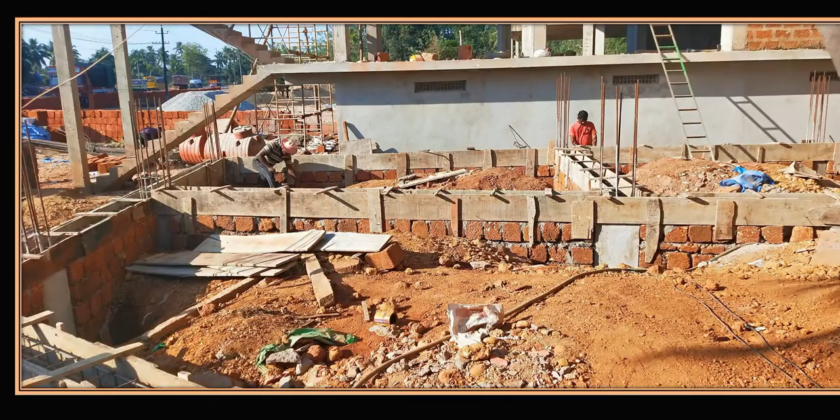See, this is one of a local construction which is happening, and you can see they have put up the plinth beam shuttering, right? So usually what they do, they cast the column up to the bottom of the plinth beam, because see, once you place the concrete, the concrete will be up to this level, so this will be my top of plinth beam.

Let me write it here. So this will become my top of plinth beam, isn't it? I'll write it as PB, top of plinth beam, right? So this becomes my top of plinth beam.

So whenever we do the casting of the column, we have to do it up to the bottom of the plinth beam, and once your column casting up to the bottom of the plinth beam is done, next what we do, usually here in the local construction, they put up this laterite stone. You can see the stones here. So these are the laterite stones. They are going to put up the laterite stone up to the top of this RCC column, or you can say up to the bottom.

And once that is done, they put up this shuttering. So you can see the shuttering here. All these are the wooden shuttering they have put up for the plinth beam, right? And how do you put up all these things? For that, when you're working as a site engineer, you have to refer the details, like you can see here. We are putting up a plinth beam, so you have to read the plinth beam layout. This is a drawing you usually get when you work as a site engineer.

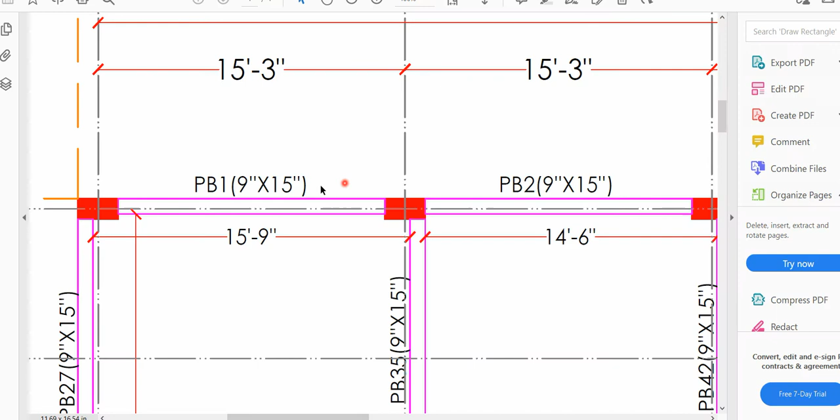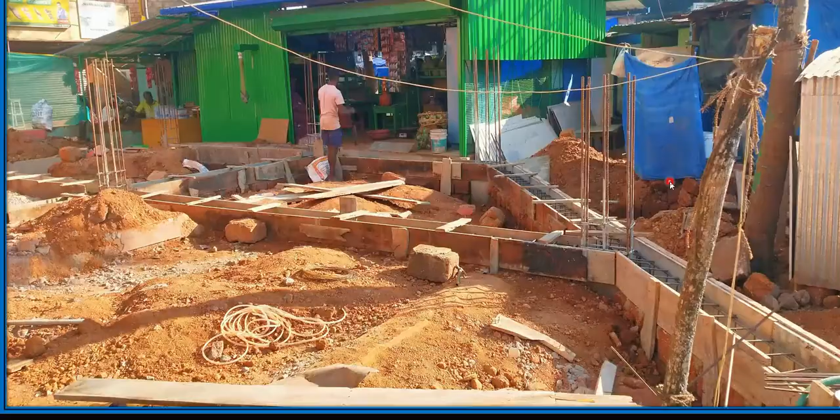See, in this way you have to keep on doing it for each and every beam. It's a very big project what I'm showing here. So once that is done, you can see one more picture here. Next you have to put up the reinforcement. You can see the reinforcement put up here. All these are my reinforcement.

Now for the reinforcement, you are going to get a different drawing. You can see what is written here, a schedule of RCC plinth beam. This is PB1, PB14, PB19, all these are the different beams. If I go back here, you can see all the beams, like PB20, PB21, PB16, PB15 and all. Here only the sizes are mentioned. You don't know what reinforcement is coming here. For that you have to refer this kind of drawings.

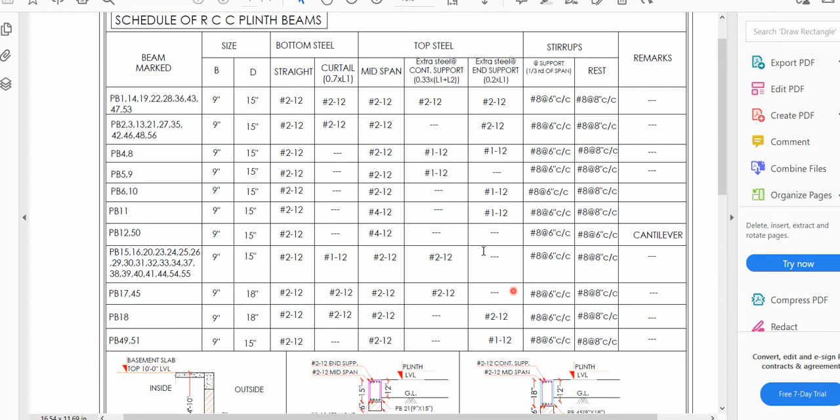Let us say, for example, I want to look at this particular beam, PB20. I want to know what kind of reinforcement I am supposed to provide here. So I'll go here and search for PB20. I'll just scroll down quickly.

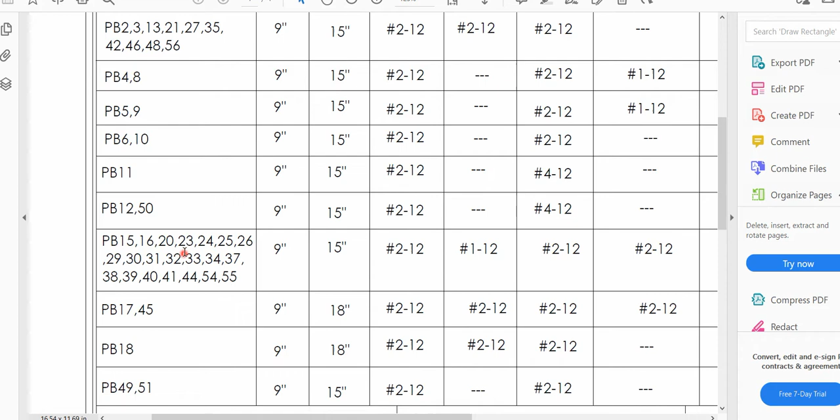Yeah, you can see it here, right? PB15, 16 and 20. That means PB16, 23, all these are the same kind of beam, where the size of the beam is 9 inches and the depth is 15 inches. And then they have mentioned here what is called bottom steel and what is called top steel.

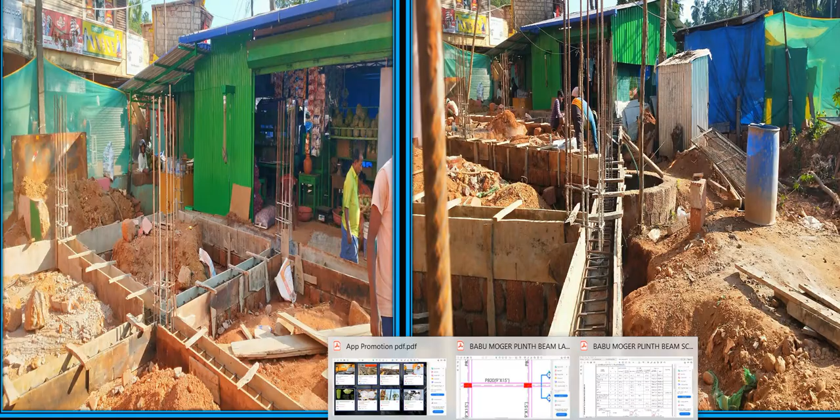Now if I go back to the PPT again, you can see here the top steel. You can see here you are providing a top steel, isn't it? So this is my top steel, you can see here. And in the bottom also you can see certain reinforcement. This will be my bottom reinforcement. So all these things will be given in the structural drawing. So it's given here, bottom steel and top steel.

Okay, now coming to this point, we will not understand this in the same lecture, because it will become a long lecture. Forget about all these things, straight, curtail, mid span and all. Okay, and then coming to the stirrup. Stirrup means, you can see it here. So these are called stirrups. You can see they are put up in this way, no? See, something like this. Yeah, it has gone in this way. Okay, so these are called stirrups.

Now what diameter of the stirrup you are supposed to use, and what is the spacing, right? So that is very important. What is the spacing you are supposed to keep? Like say in between these two stirrups, what is the spacing? What is the spacing in between these two? All these things will be mentioned in the structural drawing again.

I'll go back to that again. So you can see it's written here. You have to provide an 8 mm bar at 6 inches center to center spacing. And what do you mean by this? At support 1/3 of span and rest. All these things we'll try to understand as we go forward in the lectures, right?

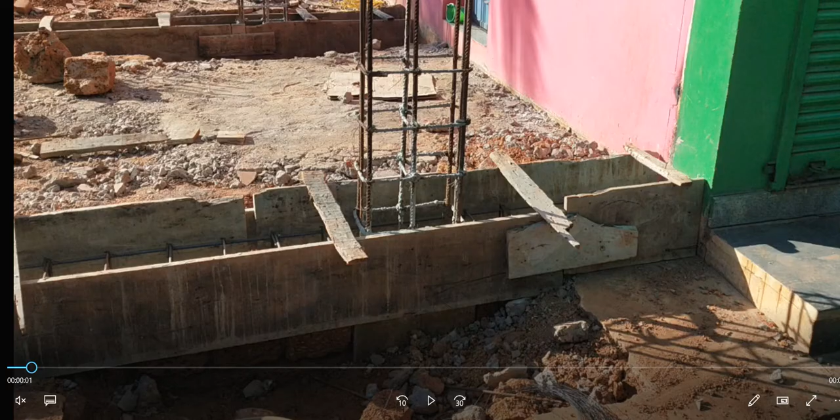Anyway, we'll go back to our main part of this video. So I'll be playing this video. Just see how this shuttering is done. See, all these are the shuttering what they have done, right? Again, it's a local construction. They'll not be following the quality stuff and all, because these people don't believe in providing the cover blocks, right? Because the usual practice is that we need to provide the cover block.

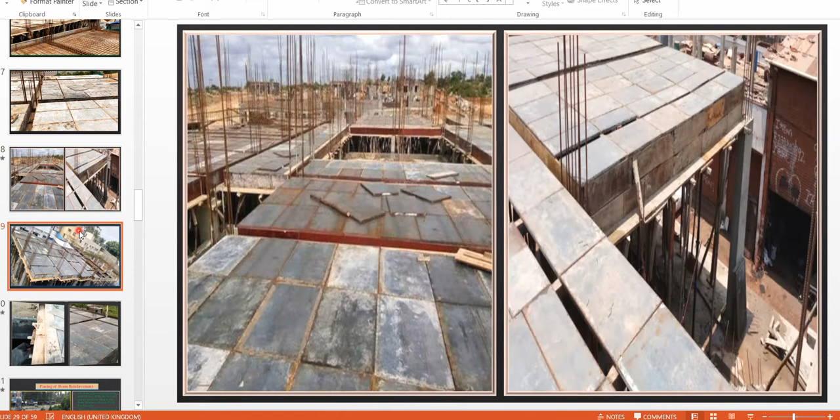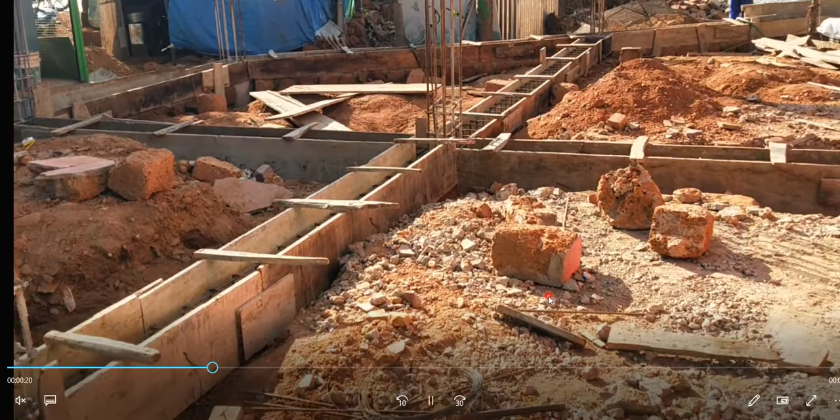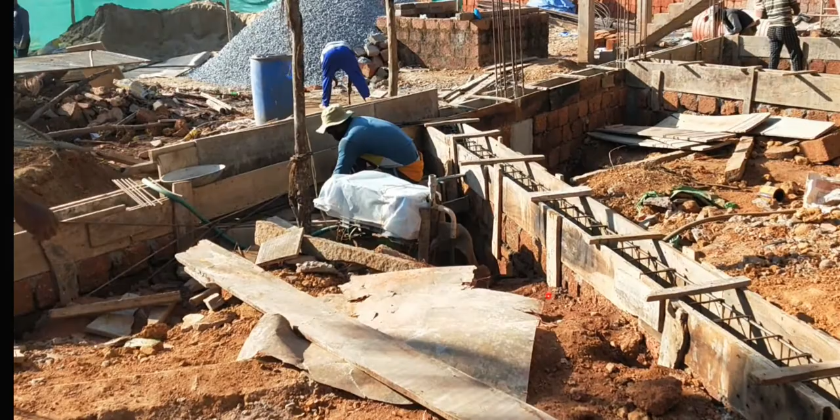Anyway, we'll go back again. Yeah, so you can see, but in the local construction it's okay, you can do something like this and people are okay with this. But when we are a site engineer, we need to make sure that everything is happening according to the quality. So this is around 1000 square feet area what we have. They're putting up one small commercial building here. We'll be trying to upload a lot of videos related to this.

Yeah, anyway, I'll try to forward this a bit. Okay, so all the shuttering is done here. So as a site engineer, it will be your duty to look into the measurement, whether the breadth what they have given is exactly correct or not, whatever depth they have given is correct or not according to the drawing. Let us say you are a site engineer of this particular area, then what are the roles that you are supposed to follow? Need to check the reinforcement, need to check the shuttering, need to check whether the shuttering alignment is correct or not. Anyhow, we'll go forward now.

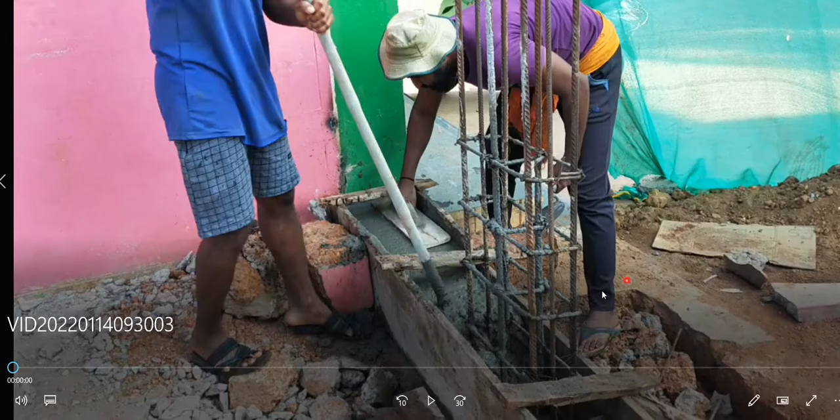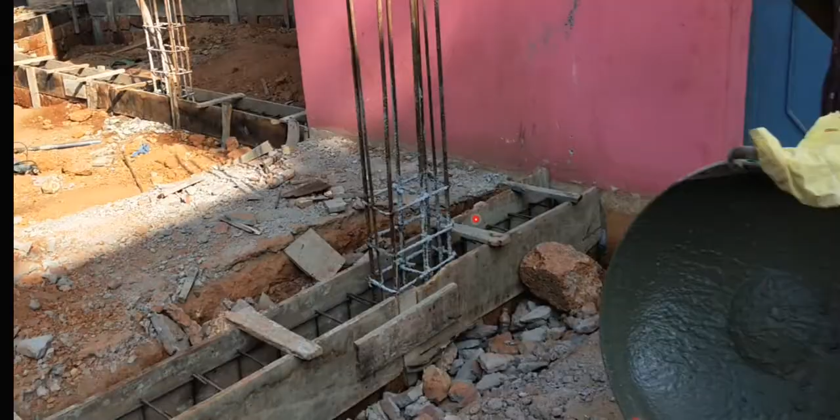So once that is done, we are going to do the concreting here. So it's a nominal mix. What we have used is M20 grade of concrete, and this is how they're preparing the concrete. It's a nominal mix, right? Because you can't see a concrete mixer here. All these are volumetric batching, right? Based on the volume they are going to prepare the concrete here, and this is how they are going to place the concrete, right? Again, it's not the exact right way of placing concrete, because you need to have a needle vibrator. But anyhow, as I mentioned, in the local construction, all these are okay and fine.

Again, when you place the concrete, make sure, we have learned this in concrete technology, make sure that the fall of the concrete from here to here is not more than how much? It has to be not more than 1.5 meter, right? What will happen if it is greater than 1.5 meter? We have learned a concept called segregation, right, where the separation of the particles is going to happen.

So again, as a site engineer, you need to look at how these laborers are going to pour the concrete. They should not pour the concrete from greater than 1.5 meter, okay? Otherwise your aggregate will come to one side, your cement paste will be on the other side. And also, especially near the column reinforcement area, you need to do a lot of compaction. I mean, you have to do good tamping, because we'll be having a lot of reinforcement there, right? That is the reason you have to use a needle vibrator there.

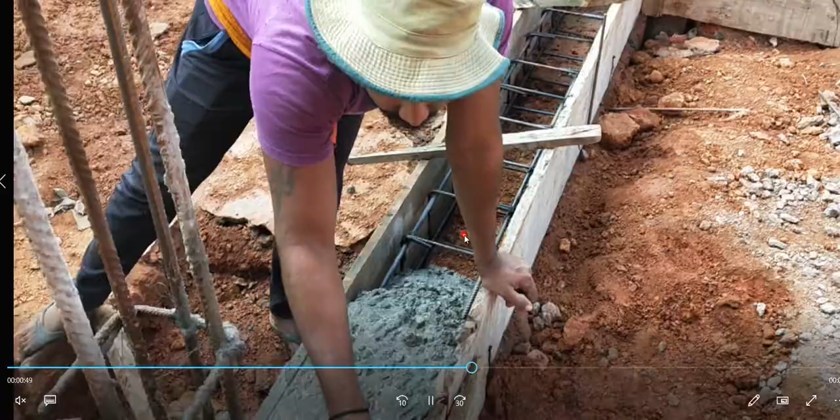I can see here, this is also not a good practice. What they are doing, you have soil here, and directly they have put up the reinforcement, and over that they are going to do the concreting work. Again, it is not a good practice, right? Because the best practice is that they should have put a small PCC here, and over the PCC they should have put a cover block and then kept the reinforcement. But in order to save money, and in order to get the construction done at a faster rate, these are the things that we follow.

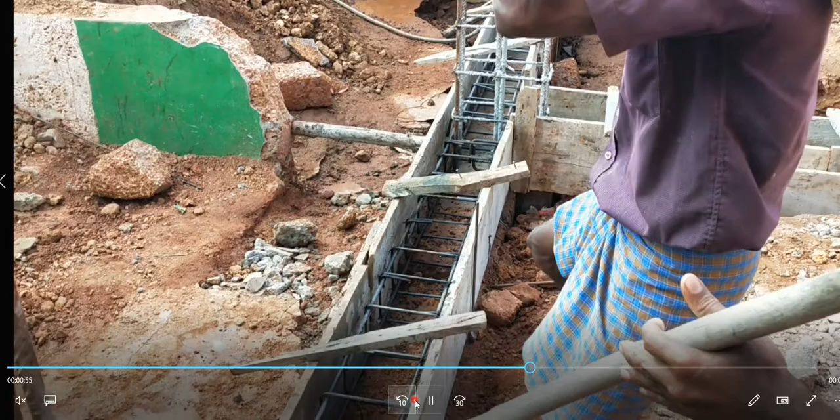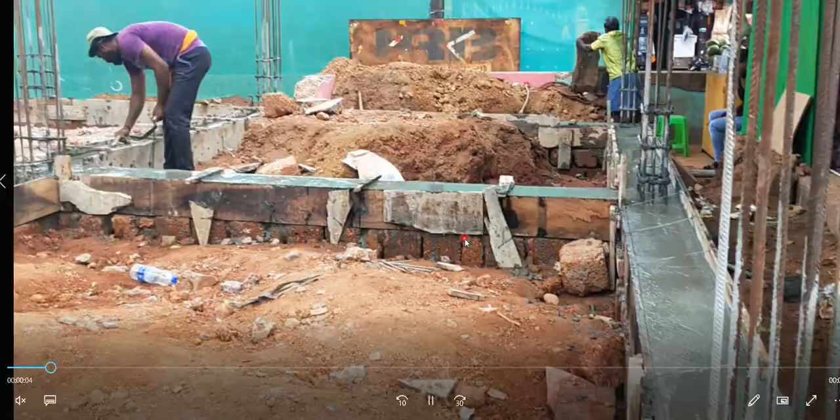See, you can see a lot of soil here, and over that the concrete is being placed, isn't it? But since it's a small structure, people are not too worried about all these things, and it's okay for them. Let me try to run this video again. So this is the entire plinth beam layout, what you can see. And what is this activity? This is called finishing activity, where they are going to do the finishing of it. And finally, this is how it looks once you are done with the concreting. So this is how your plinth beam is going to look, right?

So why are all these things put up? These things are put up so that the shuttering will not run. I mean, it will not bulge from here, because if you don't put this, since your concrete has a lot of density, this shuttering may get displaced, right? So that is why the usual practice is that they put up these small runners, 1, 2, 3 here you can see, so that there won't be any bulging in your beams.

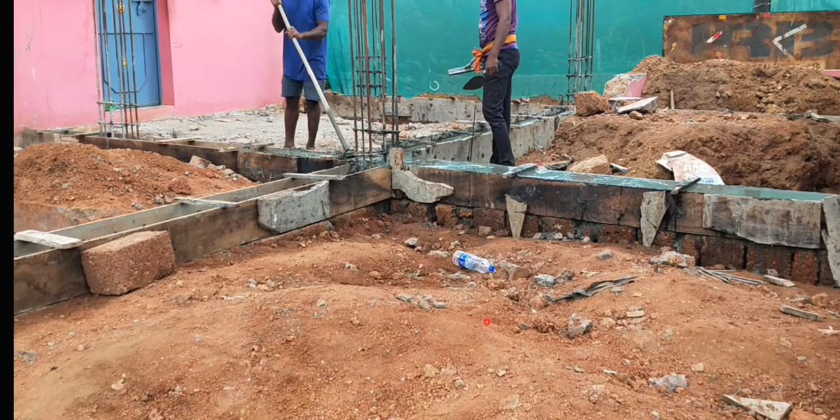Again, when you go for very high rise construction, we use different methods. Like we can make use of Acrow spans. We are going to make use of shikanja and all, so that there won't be any bulging of a beam. Since it's small here, it's okay. So finally, this is how it's going to happen. And soon after that, next day we have to do the deshuttering of this, again followed by the curing process.

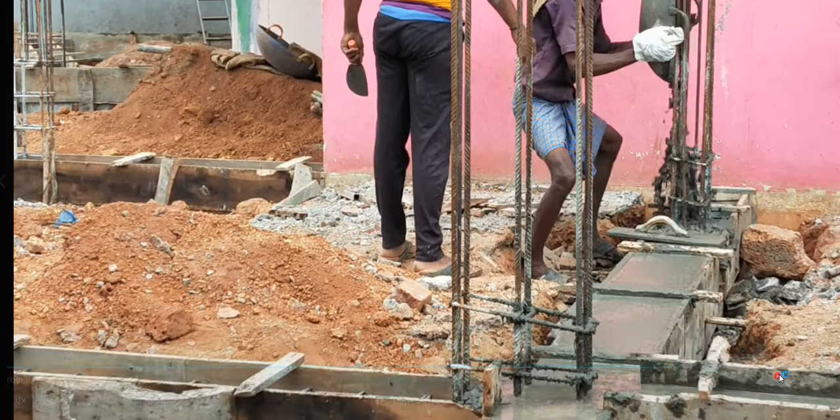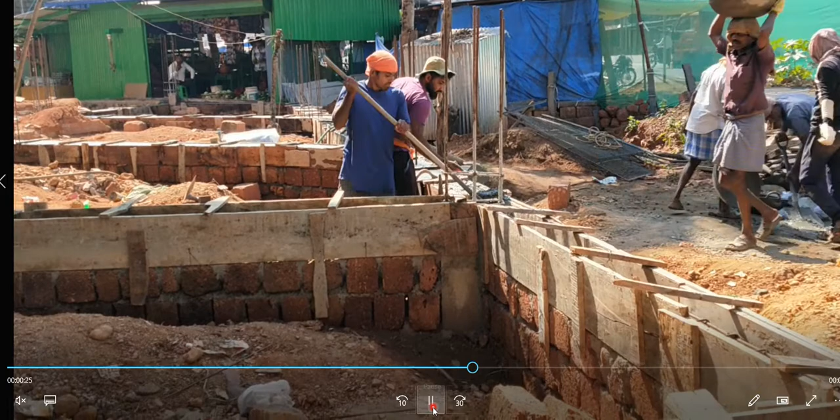I'll try to run this. So again, look at the height of that fall. And finally, you are into the last plinth beam. Almost all the plinth beams here have been completed. Now we are almost in the last stage of the concreting work. So in this way, we need to understand the sequence of the construction, and that's how it is to be done.